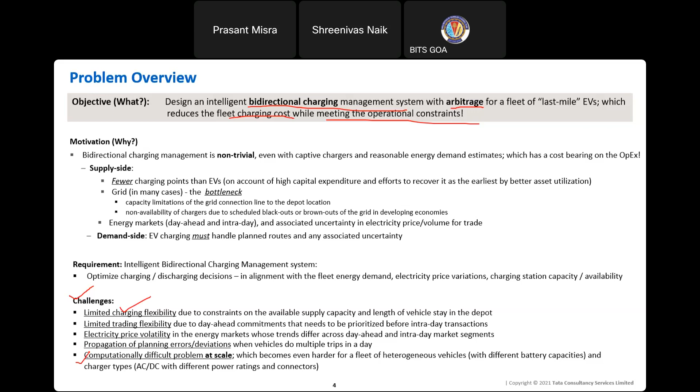Moving ahead, this is basically the operation problem. Here we have the fleet manager, or operations manager. As mentioned, you have a fleet of vehicles, some few captive chargers, a departure schedule for the vehicles, a delivery route for these vehicles, and you are trying to buy and sell energy in the energy markets, both day-ahead and intraday. These are some of the givens, and you need to obtain certain things within the constraints you have to operate in. So this is basically the larger operation question that we want to solve here.

Now let me break that down. What is the solution we have come up with? The solution is actually twofold: one is a day-ahead planner for charging, and the other is an intraday planner for arbitrage. So we do not use both markets for doing charging and arbitrage as is. We have somehow divided the roles: we say we will do charging only in the day-ahead market, so whatever energy is needed for charging, we use the day-ahead market for that. Whereas if we have to do arbitrage, which means selling and buying energy, that is something we'll do in the intraday market.

Now, why do we believe this model is good? Because we have a very nicely decoupled operation model, wherein you meet your charging needs from the day-ahead market, which means your regular business operations don't get impacted. But if you have an aspiration to make some more revenue through arbitrage, you can nevertheless do it in the intraday markets. So essentially, it's completely up to the operator as to how risk-averse he wants to be.

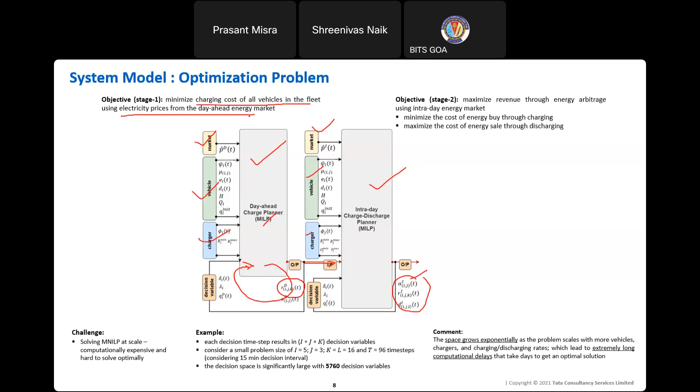So the objective of the first planner is to minimize the charging cost of all vehicles in the fleet using electricity prices from the day-ahead market. As I mentioned, you want to use it solely for charging purposes, and the aim of that particular stage is to minimize the cost of charging of the entire fleet.

However, the objective of stage 2 is slightly different, wherein we want to maximize revenue through energy arbitrage using intraday markets. This means when I enter into energy arbitrage, I want to minimize the cost of energy buy through charging, and maximize the revenue of energy sale through discharging. So I want to maximize my sale of energy and minimize the buy of energy. Only then can I really make some money out of it. That's the objective of the second stage.

Now, we have a very detailed formulation for it, which I will take you through in a while. But to give you an idea of how complicated this problem is, solving such a problem at scale is the challenge. For example, at each decision time step, I have to come up with these many decision variables. Essentially, I have i into j into k.

And what is I? I is essentially the number of vehicles, J is the number of chargers, and K is the number of charging rates, right?

So if you have a fleet of 5 vehicles, let's say three charging stations, and let's say the charging station supports 16 charging rates, going all the way from 1 ampere to 16 amperes at a step of 1 ampere each. So you have 16 charging rates, right? And you want to do it for t equal to 96 steps, essentially for the entire day, right?

So for such a small problem dimension, we will end up calculating in excess of 5,700 decision variables. For such a small problem.

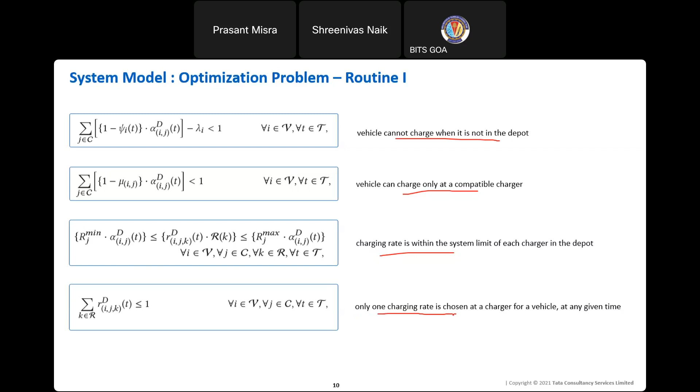Now routine 2, as I mentioned, we want to maximize the revenue through energy arbitrage using intraday markets, which means that we want to minimize the cost of energy bought through charging and maximize the revenue of energy sold through discharging, right? So most of the constraints that we went through hold the same. It's just that they have to be conditioned on intraday dynamics.

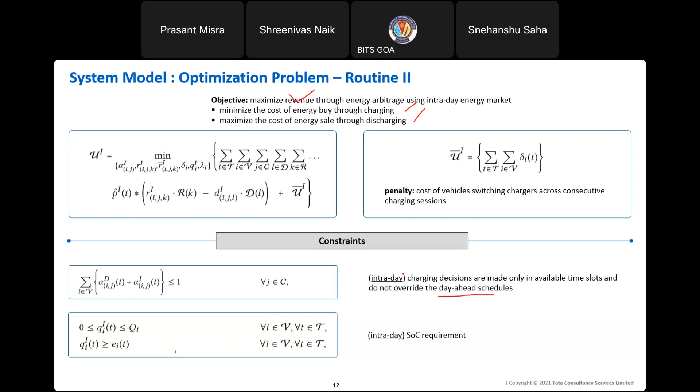For example, when we are in the intraday period, let's say a particular decision has been taken in the day-ahead schedule. In my intraday planner, I cannot override those decisions because they were already taken for the day-ahead schedule, right? So those have to be respected. Similarly, SOC requirements have to be respected. Again, vehicle availability and vehicle charger compatibility have to be respected. And the charging and discharging rates have to be respected.

Just hold on 1 second. Just hold on. Yeah. I'm so sorry.

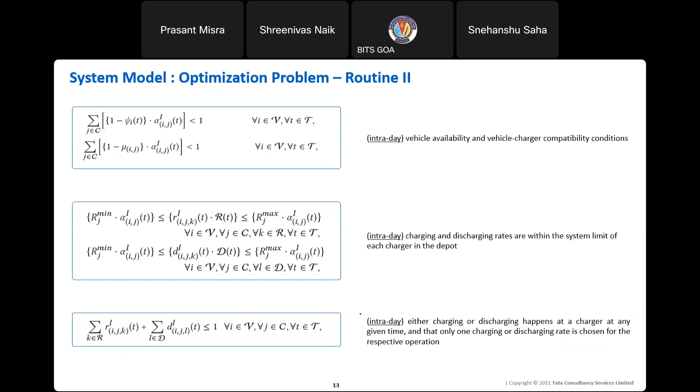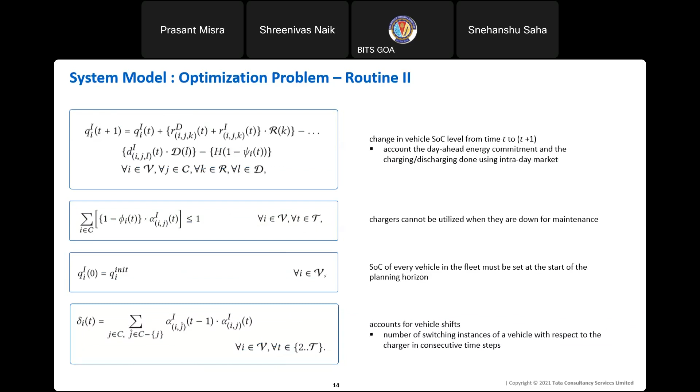And then this is a constraint that says that at any given time, the vehicle is either charging or discharging. It cannot do both at the same time, right? So this constraint tries to ensure that. Other constraints are similar to what we discussed in routine 1, but they are specific to the intraday conditions. So you can look at it.

And I was making the point that you have to calculate this many decision variables even for a small problem size, so you can see why it is such a complicated problem when you look at the number of steps needed to reach the optimal solution. To overcome that, for the day-ahead part, we have come up with a learning agent model for charging. The planning decision here is which vehicle is assigned to which charger, at what charging rate, and for how long it should charge. That's the charging decision I want to come up with, right?

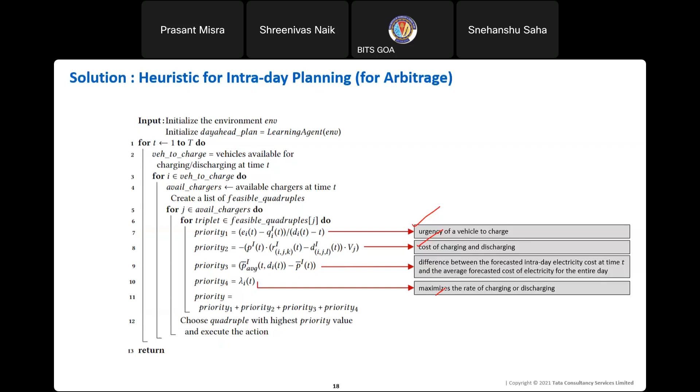So I come up with a priority function based on all these 4 different levels of priority, and based on that I come up with a planner saying which vehicle should be assigned to which charger and at what charging rate. Okay. So quickly moving on to some results here. So just to recap here, I'm going backward again.

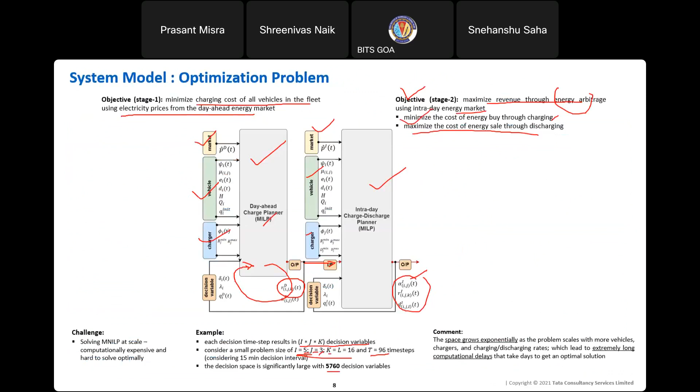So we discussed the day-ahead planner, and we also discussed the intraday planner. And for the day-ahead planner, what I discussed is a learning agent that is essentially a graph network with a two-stage encoding. And for the intraday planner, we have come up with a priority order-based heuristic.

And mind you, both these planners have different objectives. The day-ahead planner is solely for making sure that we're able to charge the entire fleet, while the intraday planner is used for arbitrage operations, wherein I engage in selling and buying energy in this stage. Okay.

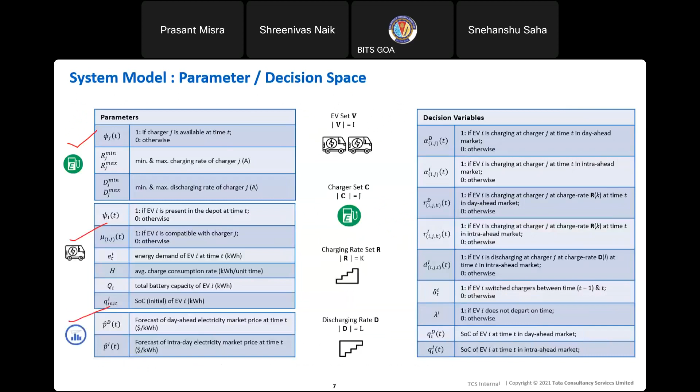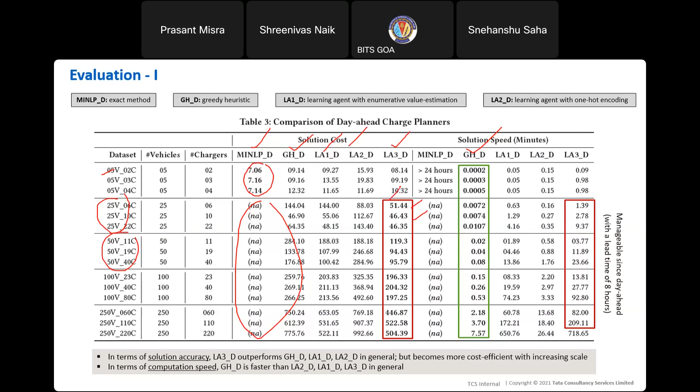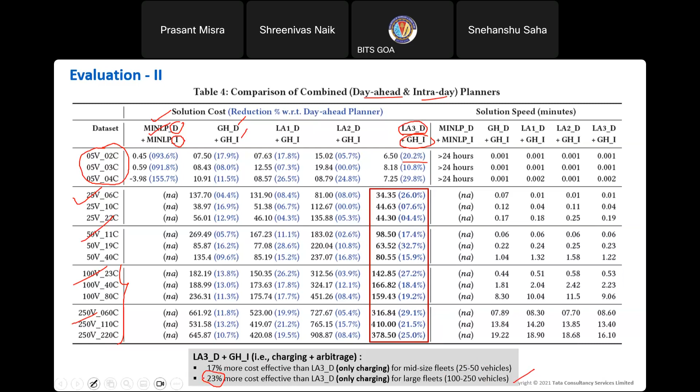So with this, I'll come to the final slide, just to summarize what I presented. We presented a model for bidirectional charging and arbitrage using electric vehicles. We formulated the optimization problem as a two-stage optimization approach. And we showed that classical approaches don't scale that well.

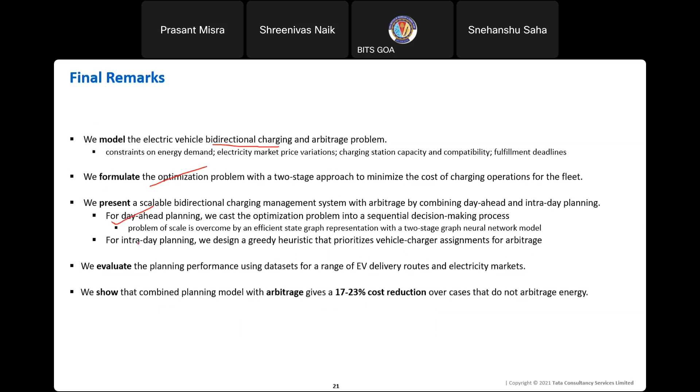That's where we have come up with a combination of a day-ahead planner that uses sequential decision making in conjunction with an intraday planner that uses a greedy heuristic. We evaluate our joint day-ahead intraday planner on specific data sets, and we are able to show that the combined planning with arbitrage gives around 17 to 23% cost reduction over cases where we don't do arbitrage. So that's the key finding from this particular study.